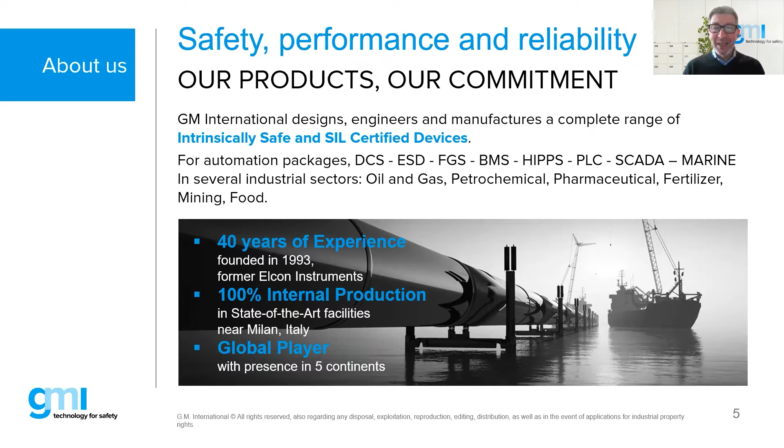On the other hand, we are global players with presence in all the continents. We have about 10 offices and over 75, actually now over 95 distributors, about 200 people. We run many courses along with the webinars.

Also, we do functional safety products. We take special care in manufacturing them, using state-of-the-art technology. We have 100% traceability, 100% testing. We offer 5 years warranty. We are certified globally, because at the end we care, because our products protect the plants they are installed in and the life of the people in the plants and nearby the plants.

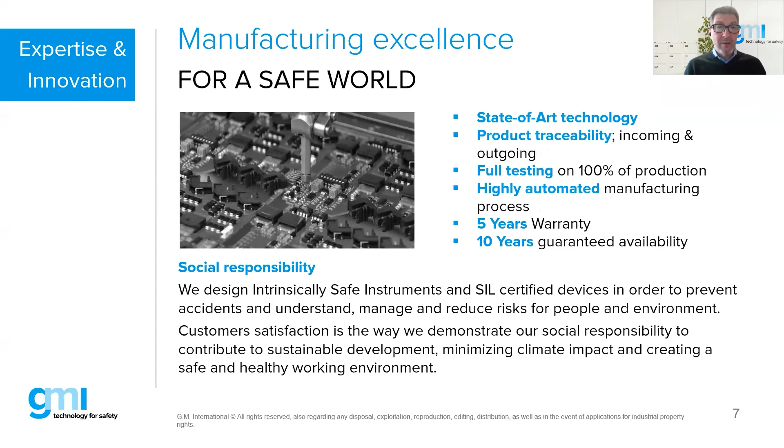Here is our certification. 100% committed to global standard regulations. They change every day. But nowadays I spend all day looking at the sanctions in Russia, which basically say we cannot sell in Russia any longer. And I have just, unfortunately, had to send a mail to our Russian team saying, hey, we have to stop selling.

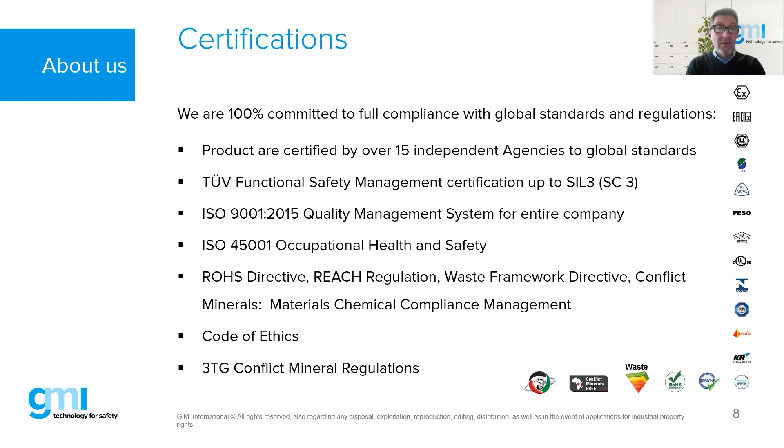So there's a lot of rules and regulations we have to follow, but typically we are certified for EX certification by over 15 agencies. We have TUV functional safety management, ISO 9001, ISO 45001, RoHS, REACH compliance with code of ethics, and so on.

These are the products we manufacture: IS barriers, safety relays with and without line monitoring, isolators, also SIL certified, some power supplies, EX and SIL certified, multiplexers, HART multiplexers, termination panels, SPD or surge protection, loop indicators, and as I mentioned earlier, a division that runs training and education.

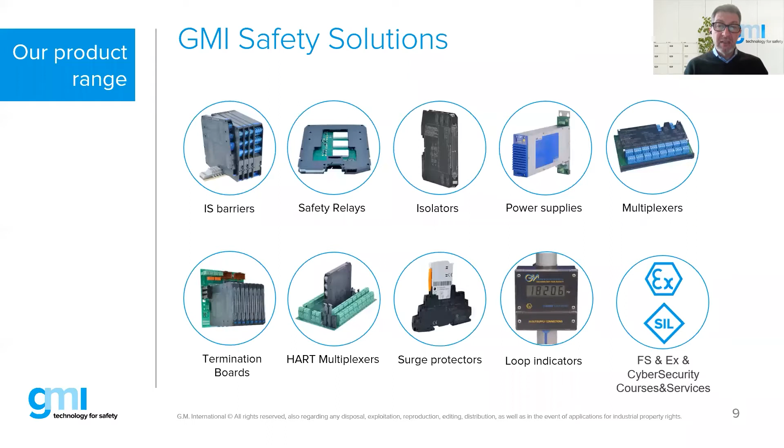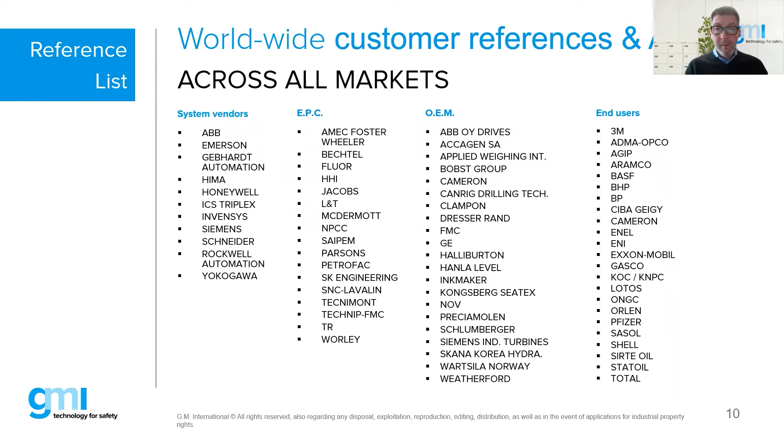Some of our customers, lots of customers all around the globe. We have a lot of OEMs which we are proud to supply to, because they install our product in their machines, rigs, which are typically placed in very rigorous environments. And our products are very, very reliable. So that's about it.

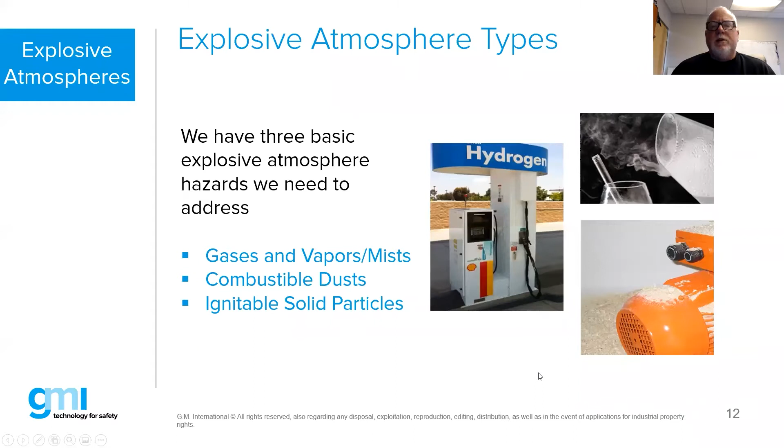So explosive atmosphere types: no matter where you are in the world, we treat explosions or explosive atmospheres in a similar fashion, regardless of the regulations. We have gases, vapors, mist, we have combustible dust, and then we have ignitable solid particles. All three of those, in proper mixtures and proper ratios, when combined, can create an explosive atmosphere. So anytime we're taking electrical equipment, as well as mechanical equipment, and putting that in there, we need to address that by providing certified products or solutions.

The important point to remember here is the term flash point. Flash point is that point at which a liquid, say for example liquefied natural gas, starts to emit vapors - that is considered to be the flash point. Sometimes people get confused with flash point versus ignition temperature. The ignition temperature is the temperature at which it will spontaneously ignite. So flash points are always lower than the ignition temperature.

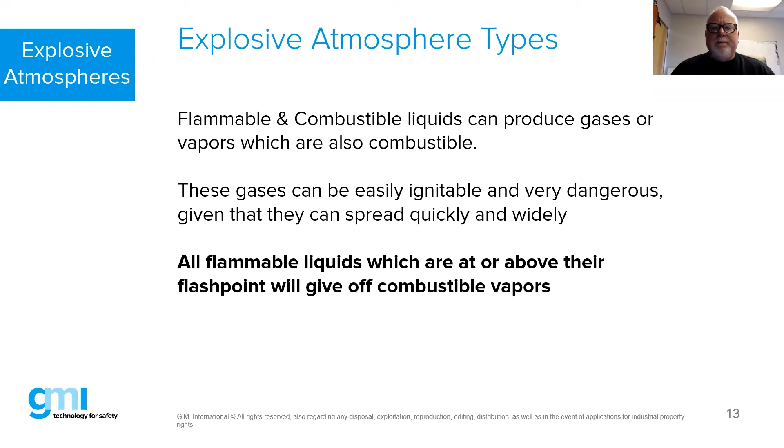Next slide. Yep. Oops. What happening here? Okay, here we go. There we go.

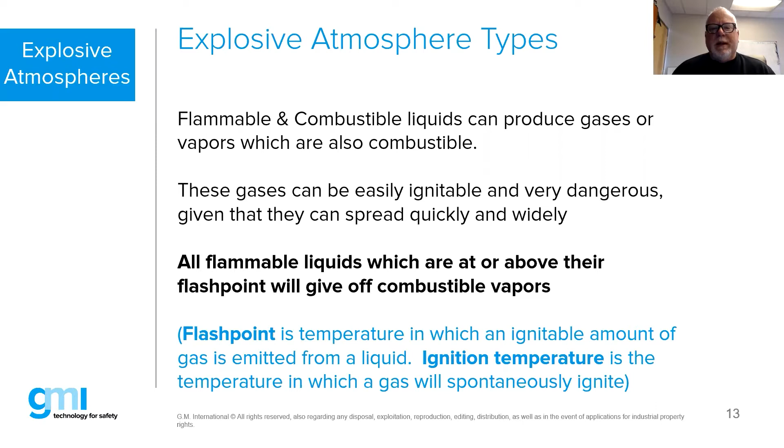Flash point is that temperature at which an ignitable amount of gas is emitted from a liquid.

Combustible dust can be any of the following types of material: metal dust, carbonaceous dust, flour, grain, wood, plastics, and chemicals. Some of you may have seen a video that's gone viral, which looked very much like what's going on in Ukraine right now, but it was a coal dust explosion that took place in Pakistan. It was an entire facility leveled based upon coal dust. They haven't figured out exactly what transpired, but it looked as if it started in an area with transportation conveyor belts, and most likely it was probably some overheating of a bearing.

When we have dust explosions, they can be just as volatile, just as dangerous, just as deadly as gas explosions. We always think of the oil and gas industry or the petrochem industry as having flammable atmospheres, but we cannot forget there are other potentially dangerous atmospheres out there that we have to address in some way, shape, or form.

In order to have an explosion, we have to have a source of ignition, we have to have the explosive material - the fuel - and then we have to have air or oxygen. For the most part, with some exceptions, every explosion will have all three legs of the triangle. Now the sources of ignition can be many different potential sources, which we'll talk about here in a bit.

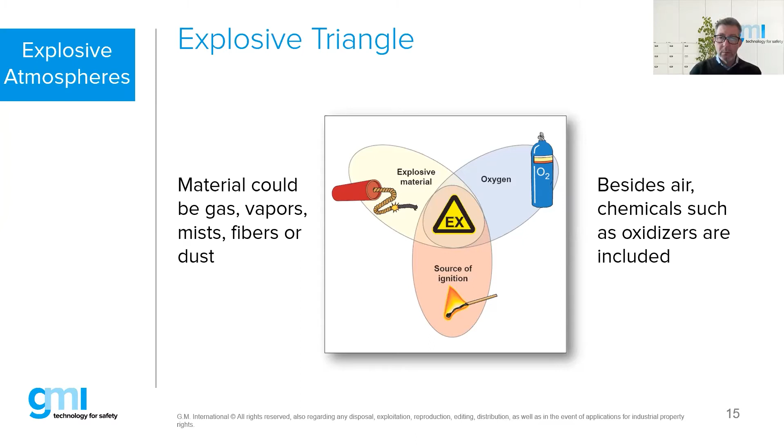What are the common ignition sources that we need to be concerned with? Some of these apply to electrical equipment, but some apply to mechanical equipment as well - things like hot surfaces, bearings, engine exhaust. We had a big explosion here in South Texas about 16 years ago with BP Texas City, and actually the source of ignition there was the diesel exhaust from a truck. That was actually the source of ignition.

Broken, damaged parts, obviously lightning, and then of course things like open flames, fires, cutting torches, cigarette lighters, pilot lights. One thing people don't think about is mechanical sparks. Obviously grinding and cutting create sparks, but even dropped tools or equipment can create a thermite action. Depending on the type of material and the tool you're using in a flammable atmosphere, that can actually create enough energy to ignite that flammable gas.

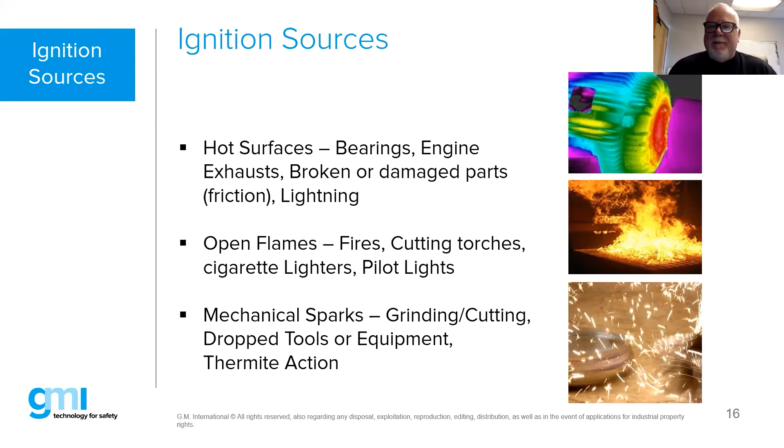Next slide. Yeah, here we are. You see it, right? Not yet. I may be. Sorry. Here we go. No, I see it. I see it.

Stray electrical currents are certainly a big one. Welding, electrical faults, could be grounding issues. It could be, besides just the normal arcing and sparking that we would normally find with contactors making or breaking. Static electricity is another big one that people overlook. Anytime we're moving materials, dust, liquids, anything like that, and putting it into containers or taking it out of containers, we can actually create static electricity, so we have to be concerned with that.

And certainly radio frequency, lasers, radio transmitters, telephones - all of those can potentially create enough energy for us to ignite a flammable atmosphere.

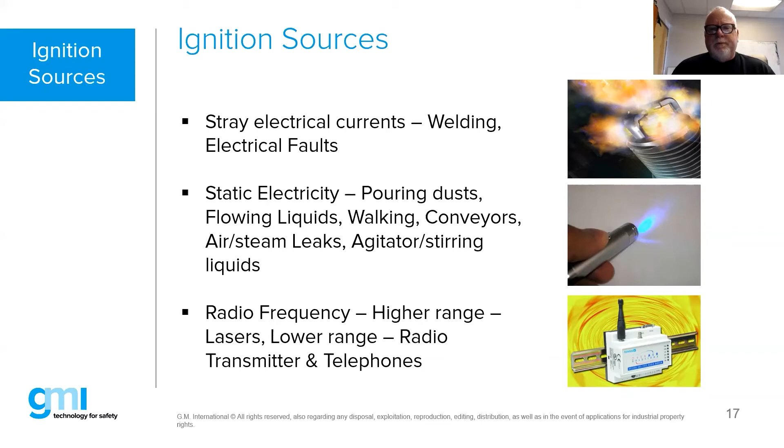Batteries certainly can be a source of ignition. If you take steel wool and put it against the two posts of a battery, or if you just touch them yourself, you can actually get enough of a little shock. Not something I would recommend doing, but certainly that's an issue.

Ionizing radiation is also a potential source of ignition, along with ultrasonics and exothermic reactions. When we think about hazardous areas, we think of the obvious sources like electrical arcing and sparking, but we really need to consider all of these other potential sources of ignition when doing our HAZOPs or facility analyses, to make sure we're not bringing equipment into those areas that could create an explosion, and to consider how our process design minimizes these effects.

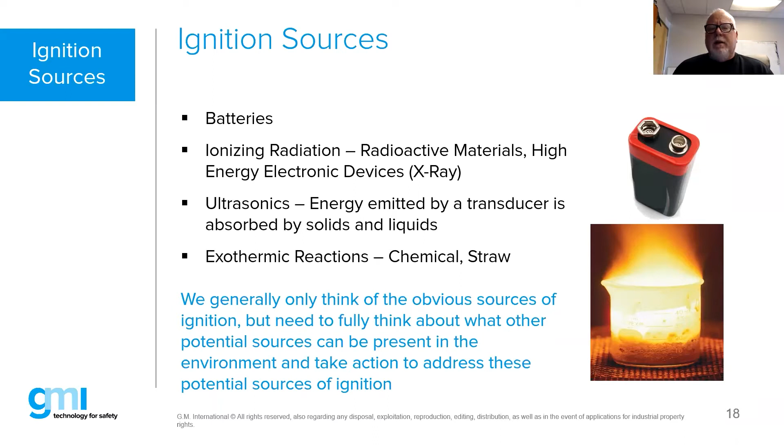Ignition temperature is one of the first things to consider. We talked about flashpoint, but every flammable gas is assigned an ignition temperature. Hydrogen, for example, is a very commonly used fuel and is becoming much more popular as an efficient fuel source. One benefit of hydrogen is that it has a very high ignition temperature, meaning it takes a fairly high temperature to ignite. However, the downside is that it doesn't take much energy to ignite hydrogen, and hydrogen also has a very broad range between its lower and upper flammable limits. So hydrogen is dangerous, but from a temperature standpoint, it's actually one of the easiest gases to deal with.

All these other gases are categorized with Roman numeral designations like 2C, 2A, or 2B, based on IEC standard 60079-20-1, which groups gases with similar characteristics. This makes it easier to select electrical or mechanical equipment for hazardous locations.

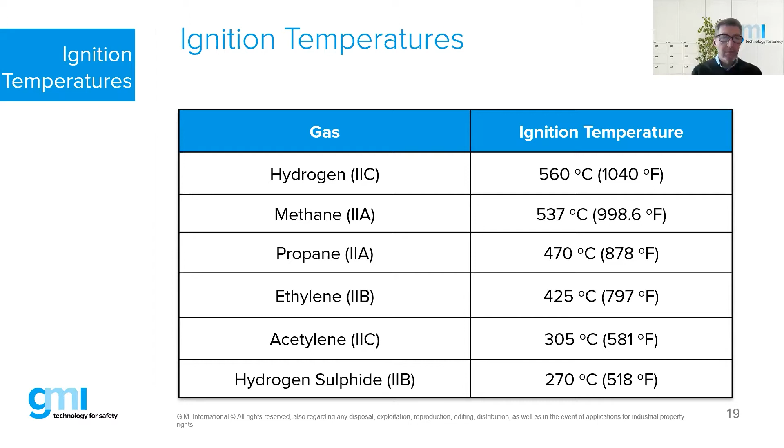Next slide. It's coming, yeah, it's coming. There we go, it's gas groups.

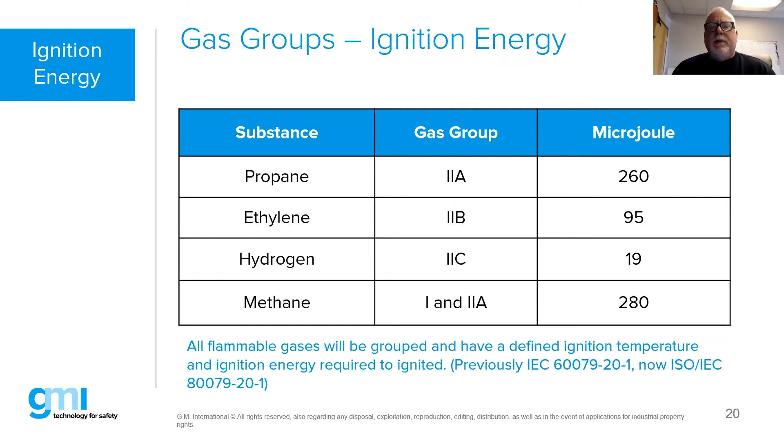Literally 19 microjoules - if I was sitting in a hydrogen-rich environment, standing on carpet, and started rubbing my feet together and lifted them, if there was enough hydrogen present, I could actually ignite it just from the static electricity caused by my feet rubbing against the carpet. So hydrogen is very dangerous, but it's something the world is looking at as an alternative fuel source.

This is another chart giving an indication about hydrogen in particular. I don't want to discount the use of hydrogen, because when properly used, it's an extremely efficient fuel source. However, a lot of people wonder what the dangers are. This chart shows the range where hydrogen-fuel-air mixtures, at certain quantities, create a potential ignition source.

Every gas has what's called a minimum ignition energy curve. This chart tells us that if we have approximately 29% hydrogen to 71% air or oxygen in an environment, it takes about 19 microjoules to set it off - a fairly high amount of hydrogen. On the left side, you'll see propane, which has a much narrower band between its lower and upper flammable limits, and takes a bit more energy to ignite. So propane is a little easier to deal with, while hydrogen is more difficult.

What is the definition of a flashpoint? Can you see the poll, Bob? Yeah, I can see people starting to answer, I can see it. Temperature in which a gas or vapor will... sorry, Pablo, my thing got held up.

You may have asked me a question. I didn't hear, no, I was just saying that the last answer sounds a little off. I said the point is solid. We're not talking solid and liquid, we're talking about gases, so I guess this could be the wrong answer. But I think I have a good idea because I have listened to Bob.

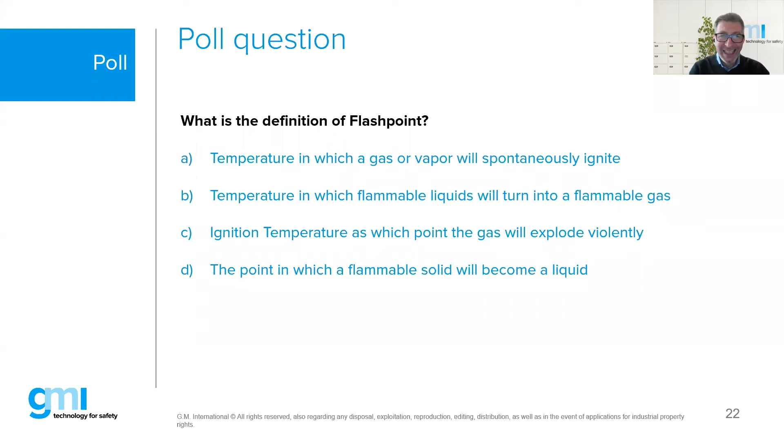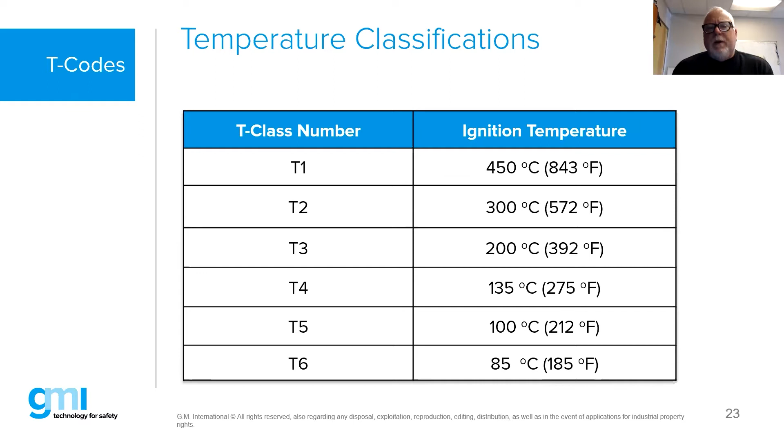So I think the next slide may give an easier understanding of this. If you can forward that, actually, maybe further on. So if you see there, hydrogen, as we focused on before, is a 2C gas, but it's a T1 gas. And remember, if you think back on that slide, hydrogen's ignition temperature was somewhere around 560 degrees C. T1 reflects 450 degrees C. So any gases or vapors that have an ignition temperature above T1 will fall as a T1 gas, so to speak.

Most of the gases and vapors you will find, about 99% of those used in industry, will be somewhere between a T1, T2, or T3. There's a handful of gases and vapors that have very low ignition temperatures. Carbon disulfide is one of those gases that is the lowest, and it has an auto ignition temperature of actually 90 degrees C. So it is very, very difficult to deal with.

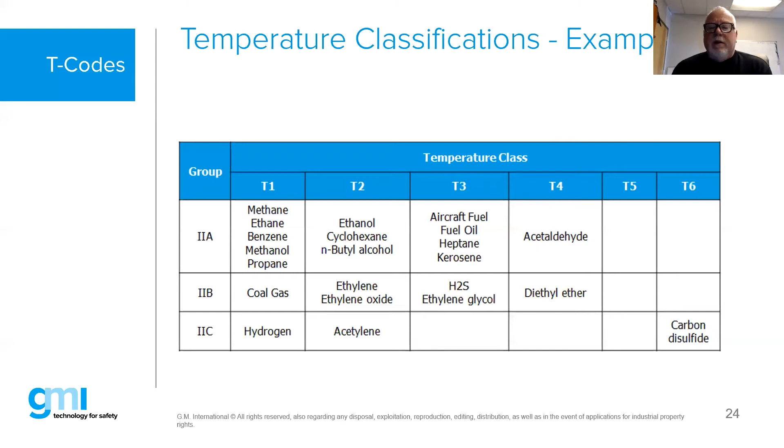A T4 product means that that product, on its relevant surface, will never exceed 135 degrees C under its maximum ambient rating. So if I have a flame-proof motor rated T4 and its maximum ambient is, say, 50 degrees C, the relevant surface exterior to the motor will never exceed 135 degrees C.

Therefore, I can use that motor in any environment where the gases are T4, T3, T2, or T1. I could not use that motor in an environment where the gases are T5 or T6. Hopefully that makes sense.

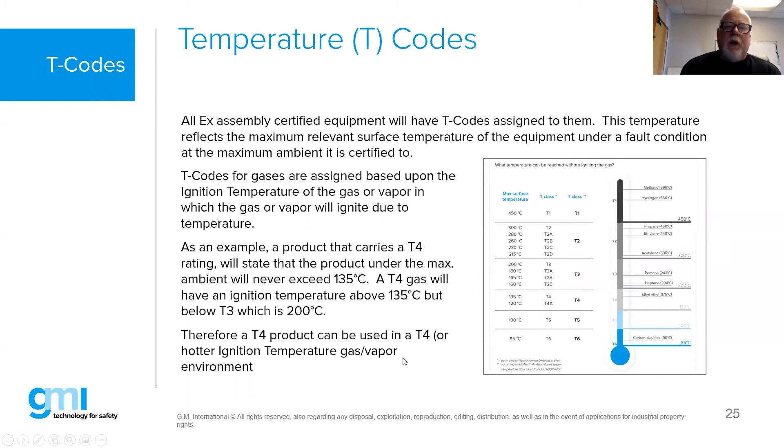Next slide, the next slide on density. Another factor in which we get into area classification is the density of the gases and vapors. So when we get into area classification requirements and we start looking at what is a zone 0, zone 1, zone 2, which I know I haven't talked about, but I assume most of you are familiar with, we also have to take into consideration the density of the gases and vapors in the environment.

So hydrogen being lighter than air, it has a density less than 1, will obviously go up near the roof, or if it's in an outdoor environment, will be dispersed into the atmosphere. Other gases, things like propane or gasoline vapors, are heavier than air. They will collect near the floor. So our area classifications will change based upon the potential flammable gases that we could see in our process facility.

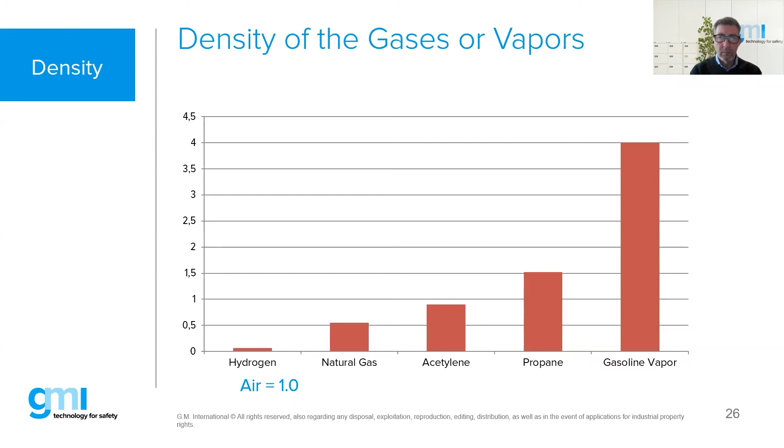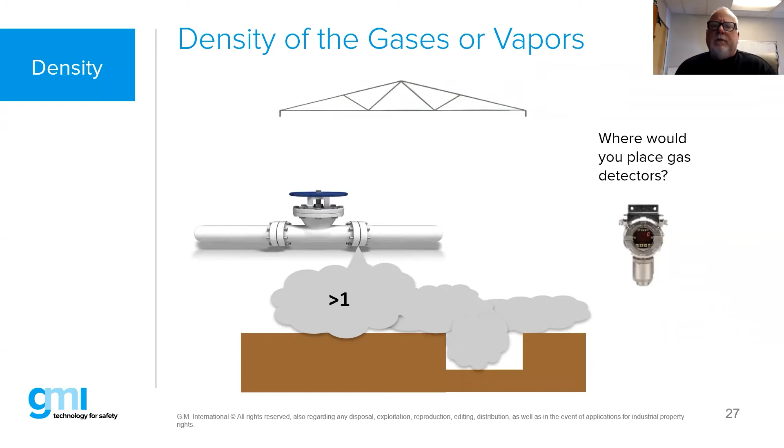Where we would place those gas detectors is based upon the density of the gas in that process pipe. So if it's heavier than air, we put our gas detectors down in lower areas. If it was lighter than air, then we would put them up near the roof. If it was the same density as air, then we'd locate them pretty close to the same elevation as where our piping is located. So density is a very important consideration to understand with regards to flammable gases and vapors.

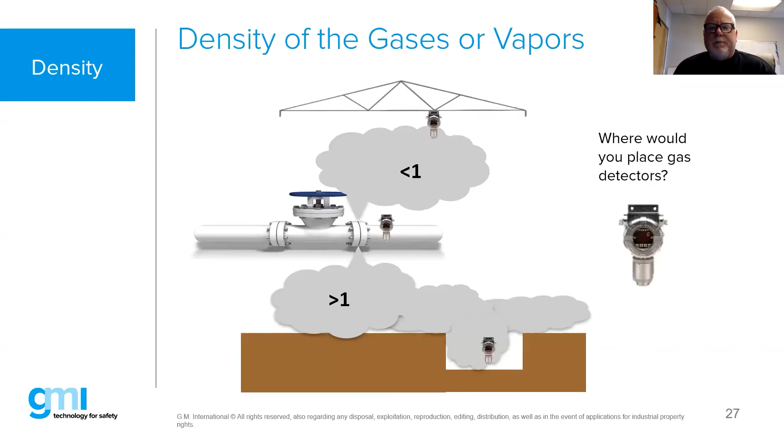All right, great, Bob. Here's the other poll. You just spoke about this. Let me launch it for you guys. You can answer. What is the T-code for a maximum surface temperature under normal or fault condition of 125 degrees C? This is a little bit difficult because you've got to remember what those numbers stood for, especially if you're not familiar with the Celsius scale.

So we had... you actually spoke about this, so I actually used this perfect example. You mentioned the answer. Yeah, you mentioned very clearly this T-code, and as soon as I said that, the correct answer started to increase. I can see your answers, guys, as they go along.

Great, but while we get this answer, you mentioned 19 microjoules will ignite hydrogen in the worst case scenario. Give me another example of that. If I drop my pen? How much energy is 19 microjoules? I'm trying to think of a practical example of microjoules. What if I take a small hammer and I go bang on my desk like this? Would that be enough?

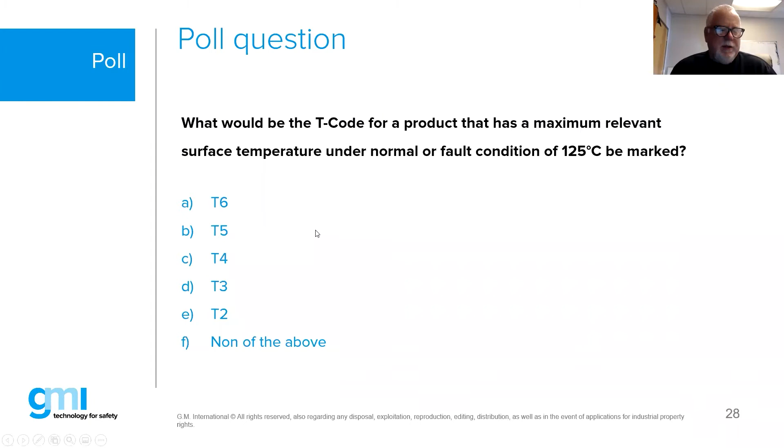And when we teach our students in the classes, I hammer this home. I say, by the end of the week, when it's all said and done and you've gone home, the one thing you will remember is T6 is 85 degrees, and so forth. So it is one of those things in the Ex world you definitely want to have a good handle on.

Right. So we talked a little bit about area classification, with density of the gas and the T-codes and all that other good stuff. So this is also out of the GMI wall chart. So we categorize a place where there could be a continuous period in which gases or vapors are present. We would consider that to be a zone 0 environment. If it's an environment which is only there occasionally during normal operation, we would consider that to be a zone 1. An environment in which it's not present during normal operation, but can be there for very short periods of time, we would consider that to be a zone 2.

The same thing holds true for dust. Instead of zone 0, it would be zone 20, 21, or 22. And then under ATEX, there are some requirements for the manufacturers from a marking standpoint. So we won't go into all the details on that, but there are some of the marking requirements that you will see. And then on the far right-hand side, you'll see what are called equipment protection levels, which are things like GA, GB, GC, so forth and so on.

So we use the IEC 60079-10-1 for gases and vapors, but there are also some other documents out there for area classification. The Energy Institute, IP15. Also in the United States, we have our recommended practices published by API. And then we also have what is called the NFPA 497 document. So they're all very similar. There are some differences, but they all are basically doing the same thing, trying to categorize the quantity, the amount, and classify these areas so we can better select equipment to be used in those facilities.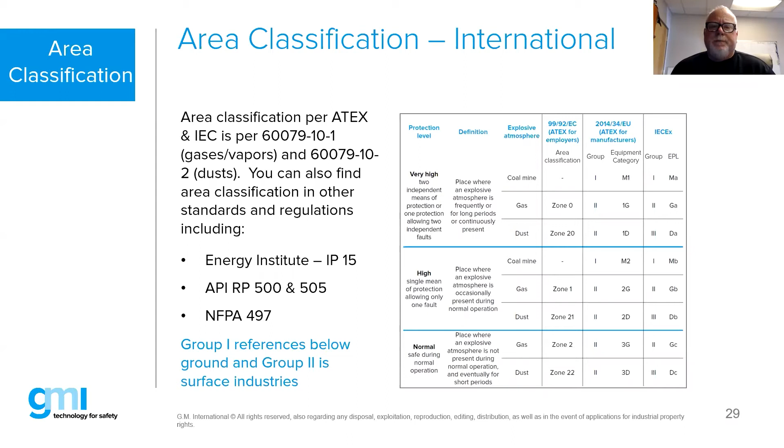Okay, next. So there is our category designation, and this is actually per the ATEX directive. So M1 or M2 are mining applications. 1, 2, or 3 are surface equipment groups. So it's either 1G, 2G, 3G, and that would be for gases. 1D, 2D, 3D for dust. Under the IEC EX, we basically have equipment groups. And actually, that's a little bit misleading. Well, actually, no, it is. It's GA, GB, GC, as opposed to 1G, 2G, 3G under ATEX. So the categories under ATEX or the EPLs under the IEC EX mean the same thing.

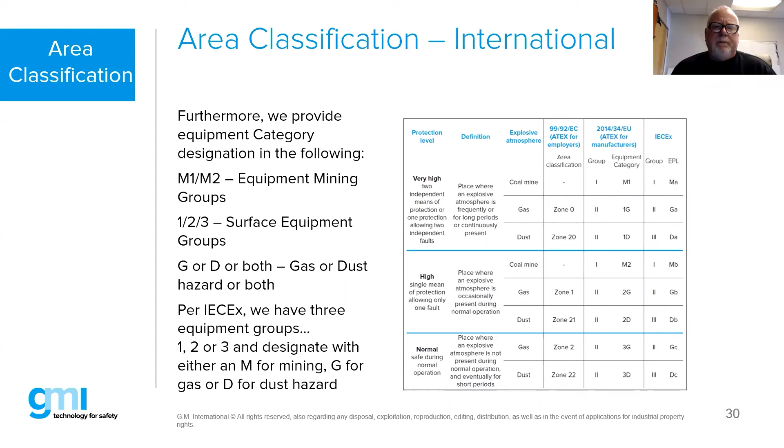And your protection levels? Right. So since we're saying a zone 0 environment is an area in which a flammable gas or dust will be present continuously, we require equipment to have a very high fault tolerant level, meaning that equipment that's approved for that environment, in effect, must be double fault tolerant. So sometimes people will ask, what's the difference between an EX ia and an ib intrinsically safe barrier? Well, an ia barrier is a 2 fault tolerant product, where an ib barrier is single fault tolerant.

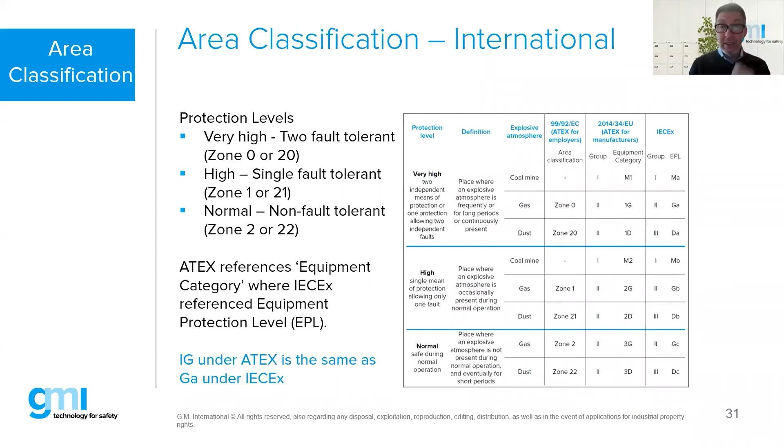So there's not the redundancy built in to a piece of equipment that's ib as there is in an ia. So for example, an ia barrier will have 3 independent Zener diodes, where an ib might only have 2. So that's why you find EX ia equipment generally is a little bit more expensive, but it also has to be much higher fault tolerant. Next. Yeah, and it can be used throughout all the gas groups, so it's easier to go that way typically. But there are some other differences.

Oh, here we go. Another poll question, guys. Let me launch it. Yeah, we were just talking about this a few moments ago, so I hope we have mostly the right answer. So what is the definition of zone 1? Is it where you have a hazardous atmosphere present frequently or continuously, a hazardous atmosphere present occasionally during normal operation, not present occasionally but infrequently, or where a dust hazardous atmosphere is present?

Okay. I cannot read the audience. Okay, so yeah, I would discard the last one. Bob, or am I making a wrong assumption here? So on the last one, that's a dust hazard, right? Right. A dust hazard would be, in that case, a zone 21 hazardous environment. So yeah, right, 21. Yes, you're right. We can rule out D.

It's A, B, or C. But Bob gave us a good indication of that. When you have 0 it's the worst case scenario, 1 is the middle case, 2 is less dangerous, if you wish. Not less dangerous, but less likely to be dangerous, right? Let's say it like that. Yeah, well, here's a little bit of a misconception. The thought process is that in a zone 2 environment, if we have an explosion, it's going to be less dangerous, right? That's not really the case.

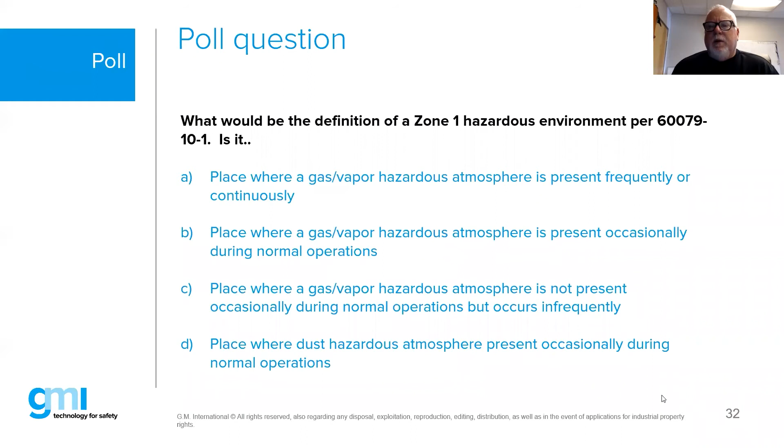Things like that drawing that I showed, those flanges of the pipe, we would consider that to be a source of release, but that's typically going to be a zone 2 environment, right? It will only happen if there's a leak in the flange or something goes wrong. That's right. It's not something that we would expect under normal operations, but it could happen. And so we want to take that into account.

So without going into all of the various protection concepts, because we are limited on time, I do want to at least mention a couple things. The EX protection concepts are broken down into 4 main categories for gas and vapor protection. So we have energy limitation. Think about hazardous location equipment: we've got a triangle, and we want to remove one or more legs of that triangle. So with energy limitation, we're basically removing that spark, keeping it low energy. Intrinsic safety is a prime example of that.

Non-sparking, another means where we're saying no sparking. We're assuming there's still fuel present, there's still oxygen or air present, but there's no sparking; that's considered to be increased safety. Containment, here's where we're talking about flameproof, where we have an arc and a spark, we have a fuel, but it'll be contained on the inside of, for example, a flameproof enclosure, or maybe sand or quartz filled, which is also considered to be containment.

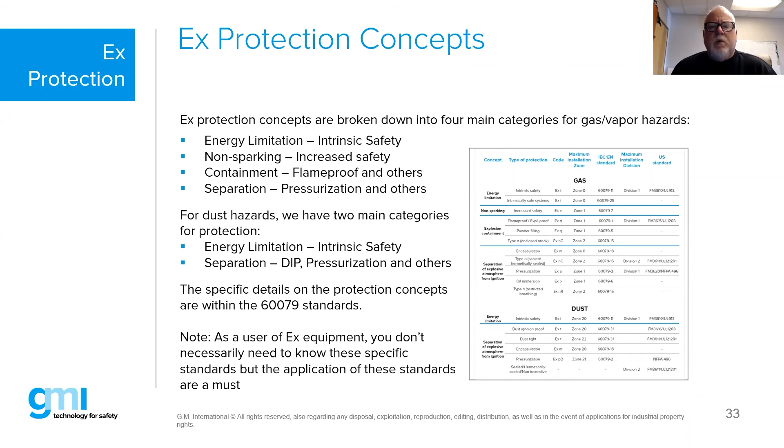A lot of people say, I need to really know the details of, for example, 60079-1, which is the standard for flameproof. Well, it's really important for the manufacturer to know that. It's not necessarily important for the user. The standard you would really want to be following, and that we teach about in our classes, is the -14 standard, which is your design and application standard, and -17, which is your inspection standard.

Oops, sorry, I don't know what I did. I clicked. That's okay. No, I think that's the right next slide. Yes, here we go. Sorry.

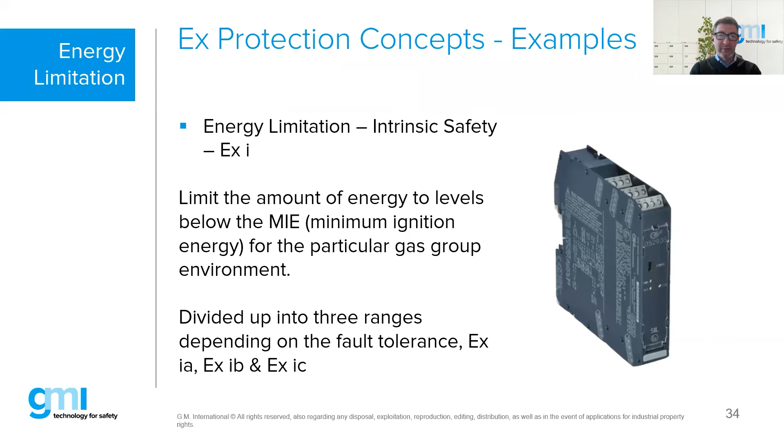That's energy limitation. We're limiting the amount of energy below the minimum ignition energy, and it's divided into different ranges, Ex ia, ib, and ic, depending on the fault tolerance. Non-sparking is increased safety. There's also a lesser form of Ex e, now known as Ex ec, and Ex e will now be known as Ex eb. So they've added the EPL letters to the end of the protection concepts, and you're seeing a lot of that in new marking requirements.

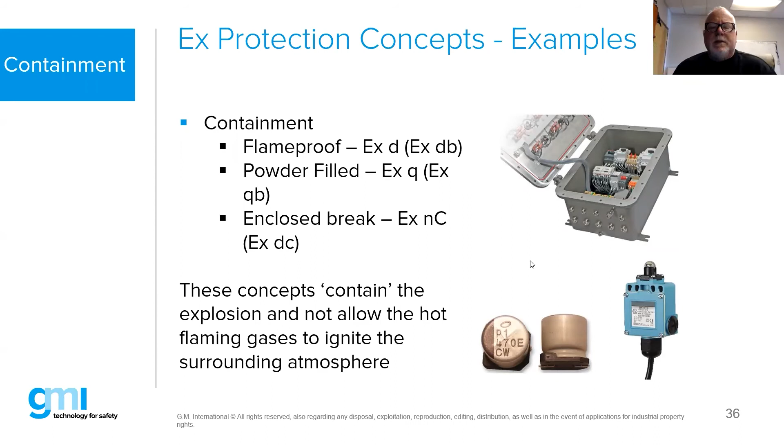Containment: flameproof, commonly known as Ex d, now known as Ex db, powder filled, enclosed break. They contain the explosion and do not allow the hot flaming gases to ignite the surrounding atmosphere. And finally we have separation. Encapsulation is using something like a resin, hermetically sealing it, pressurization, oil immersion, restricted breathing. So we're removing the flammable atmosphere away from the ignition source by various protection concepts.

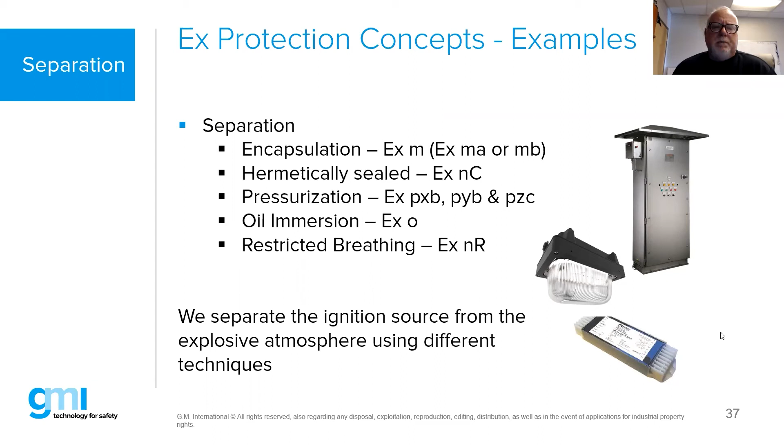Okay, Mark. So markings, just briefly going through this. On the very left-hand side, you'll see a CE mark, a 0575, and an Ex.

Everything that you see where it says under directive marking, that's a requirement under the ATEX directive. So any product must have a CE mark, an EX, and a hexagon, a 0575, which designates who the notified body is, then the equipment group, equipment category, and gas atmosphere. So Roman numeral 2 means above ground. Equipment category, in effect, means a zone 0. And then G means for gas atmospheres.

Then what you see on the right-hand side, starting with EX, that's your EX marking string. The standard marking string that you see on the right-hand side, starting from EXIA, 2C, T4, GA, that's your requirement under the IEC-EX scheme, and it's also a requirement. It's the same marking string under the ATEX directive.

So then what you see down at the bottom, starting with your certificate information, you'll see an ATEX certificate will look like what you see there, a BVS 14, ATEX, so forth and so on, your IEC-EX information, and so forth and so on. The important thing to note on labels, and this is really important, especially if you're doing design and inspections, the X means that it's a condition for safe use. So that means there's something about that particular piece of equipment that, in order to be used safely, it must be installed in accordance to whatever it states, not in the standard, but in the certificate. So it's important to understand that.

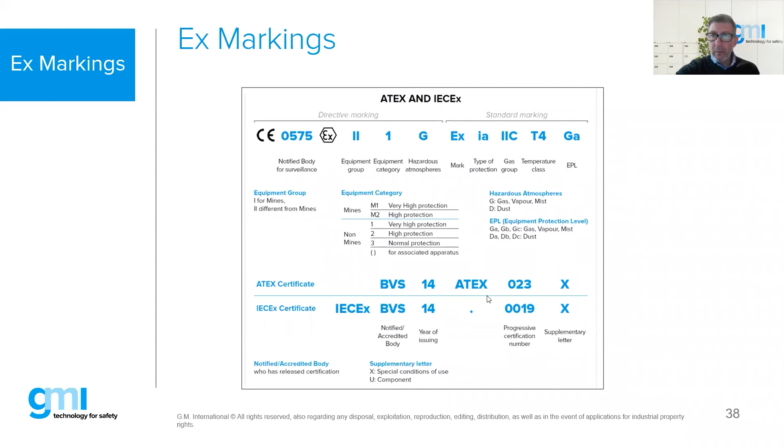Okay, next slide. Okay, why can I not move forward? Here we go. Yeah, there we go.

We do have a question here that you might be able to answer. It says, is CE marking always required for an ATEX or IECEx product? It's always required for an ATEX product. It's not a requirement for an IECEx product. And that being said, just because it has a CE mark doesn't necessarily mean it's compliant to the ATEX directive, because there are, I believe, 26 different directives that are in place within Europe. There's what is called the Toy Safety Directive. There's the Low Voltage Directive. There's the EMC Directive. There's a whole bunch of them. And any product that falls under the scope of those directives is required to have a CE mark.

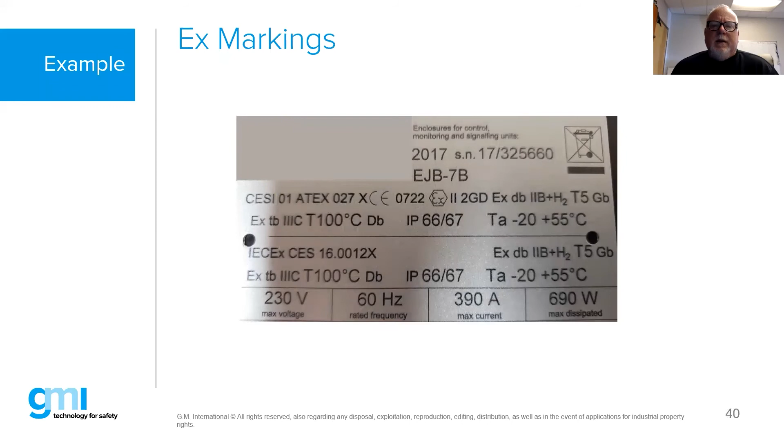Here is another example of a marking. I think you can see it. To be honest, we can probably move along on this because this is more or less telling us... Now, this marking string is somewhat difficult. It's actually one of the more difficult marking strings that you would see. So maybe we'll just... You mean on this poll? Yes, for this poll. So it'd be a tough one to answer. It's a very tough one.

Yes, but I can eliminate something. Let me share with you this. Let me launch it. I need to hold one screen today. So, what best answer describes this marking? You can do the process of elimination because EXDB is the indication for flame proof. Flame proof, yes, D is flame proof. You're right, so you can definitely say that the last answer is definitely wrong. Then what do we have?

I'm not sure, but I can read the entire string. Here we go: IA in brackets. Something in brackets means something inside, right? That's right, it's EXD—we're talking about a flame-proof enclosure. So something inside is IA, meaning it's intrinsically safe.

And then we have IIC, so the gas group that can be used, and T6 is the temperature code. Right, and GB or GA. Well, there I got lost. So GB tells us this product can be installed in a zone 1 area. The GA in parentheses reflects what's in the brackets as the associated apparatus, which can be from zone 0.

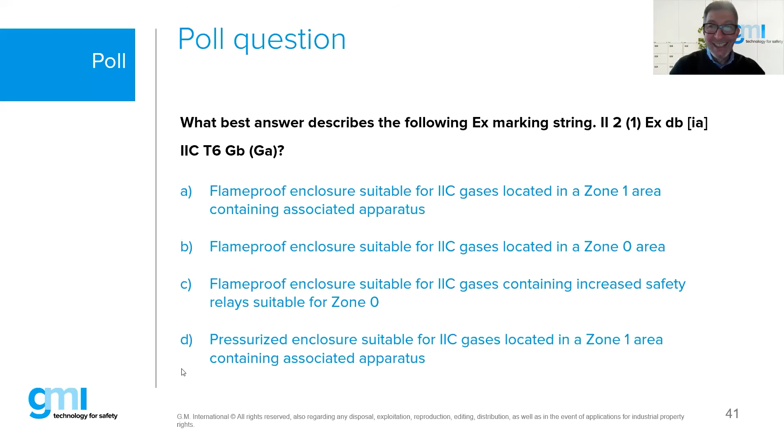Officially, anytime you see brackets like that with an IA, that's considered the associated apparatus. That's mounted inside a flame-proof box, but it's providing downstream protection into a zone 0 environment. So you have a flame-proof box mounted in zone 1, but the parentheses where it says GA is actually saying that the associated apparatus is providing protection into a zone 0.

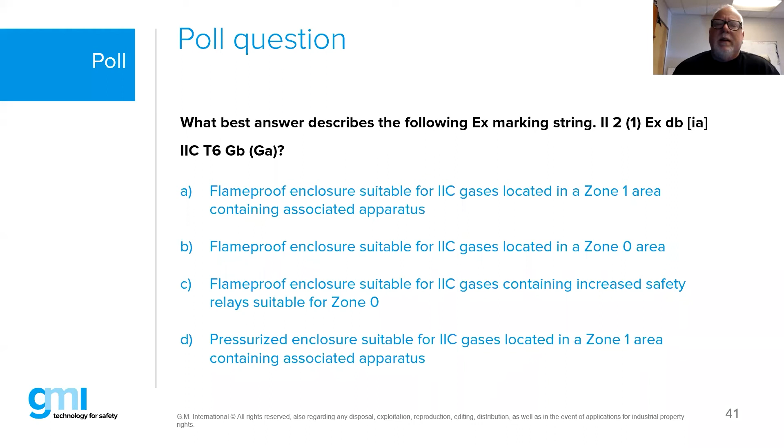So there you go. Okay, what do we get, this SIL wall chart? Yeah, I'm not going to explain that. So what do we bring in this? You were saying the SIL is also relevant in this product, I guess, right?

It is. Well, functional safety—actually everything within the EX world—there's a lot of overlap between functional safety and EX safety. You're going to see more and more of this because, in effect, what we're doing with hazardous location installations and applications is a risk assessment.

And functional safety, that's basically what we're doing. We're making a risk assessment, and under functional safety we're trying to categorize how reliable and how safe is safe. We want to put that down in percentages and do the calculations. And that's why today barriers or any of these products used in the EX environment carry a SIL number—SIL 2, SIL 3.

Yep, and it has to do with doing a risk assessment, as you say, and you say, well, my risk is very high, I need to reduce that risk a lot, so I need a product that allows me to do so—one that's more reliable.

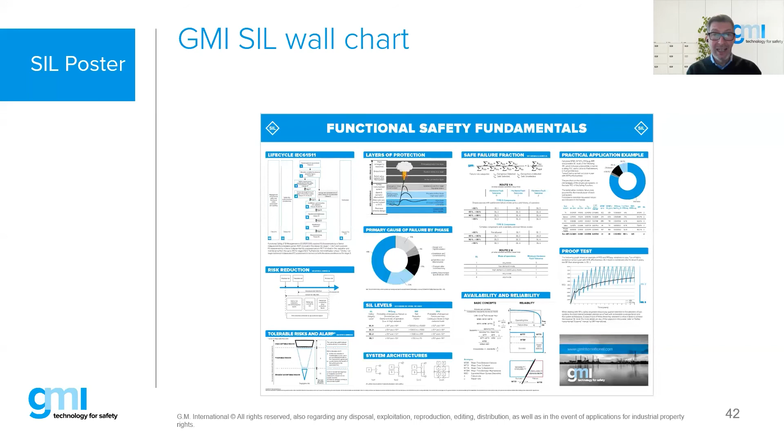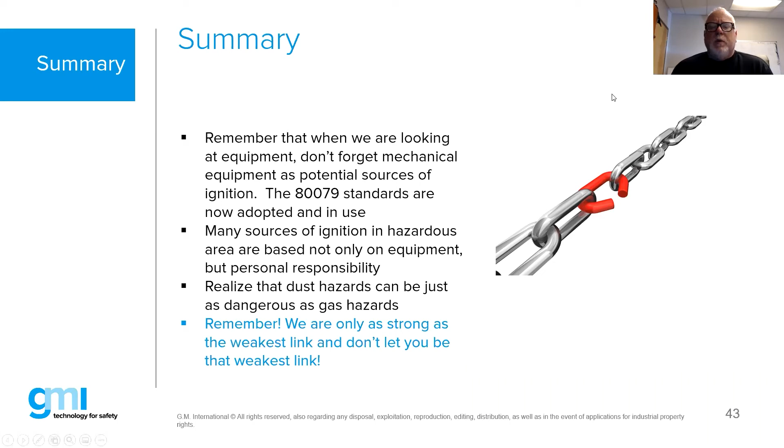Okay, summary, so we can go to question and answer soon. Remember that we are looking at mechanical equipment—we briefly mentioned the 60079 standards, but there are now 80079 standards developed from the original Cenelec standards, addressing mechanical equipment for use in hazardous locations. So just be aware of it, it's out there. You're starting to see it from more and more clients, and regulatory agencies are starting to require this. So again, more knowledge that we can have by doing these webinars—iron sharpens iron. It makes sure that we're only as strong as the weakest link, and we don't want to be that weakest link, right?

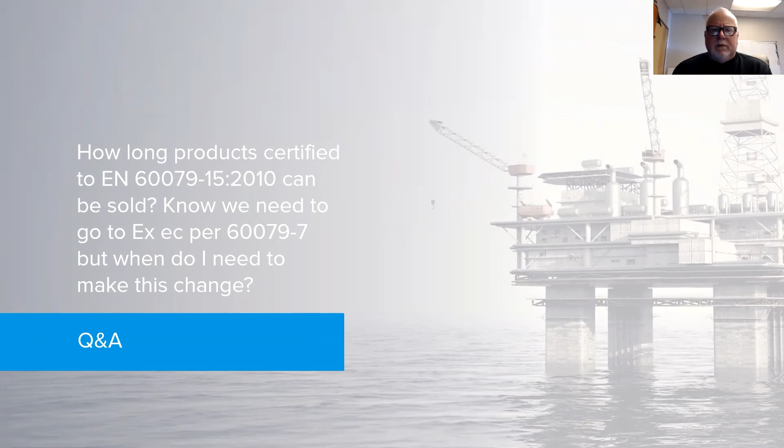So I think this question also came along: how long can a certified product be sold, or not? Or what do I need to do when the standard changes? So if we look at this slide here. Yeah, I got it. This is a great question, and it comes up every now and then. So EN standards do ultimately get withdrawn, right?

They are published by the European Commission, who put out the official journal, and you can do a search on the official journal. I did a search specifically under the 79-15 from 2010, because that is not the latest standard, and it does not show a date of withdrawal. So I can't answer that question, because on the right-hand side it would actually say there is something in there that says this will be officially withdrawn. Then that is up to each country. It's basically telling each country as part of the European Union, okay, you need to ultimately withdraw this standard because it is no longer valid, right?

Now, the question that's somewhat related, but under IECEX, people ask: do I have to get a product certified to the latest edition? Not necessarily. However, it says a new or initial IECEX shall only be issued to the current standard or one edition prior. So if you're looking to get something certified around the IECEX scheme, it makes sense to do it to the latest edition, obviously, but there is a little bit of a fallback to allow you to go one edition prior.

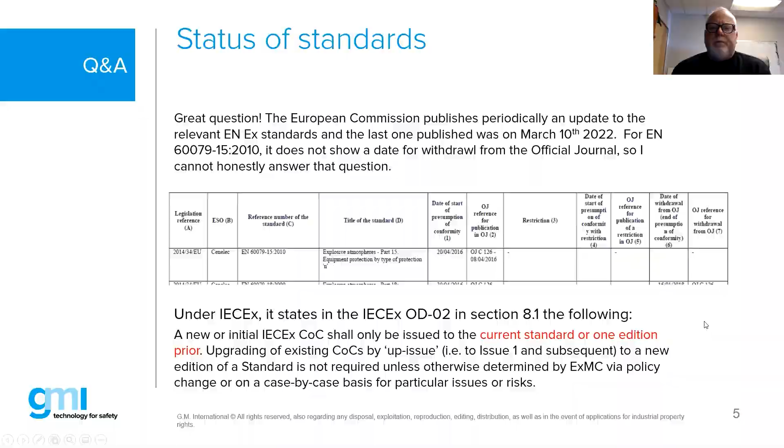Okay, what is mechanical protection around coupling? What material can I use? Well, that is a question for you, Bob. I'm not sure if I'm answering the question correctly here, but this was what I was thinking.

In the 80079-36, we talk about possible ignition sources, and it's very similar to what we talked about previously: hot surfaces, stray currents, static. So around couplings, we want to evaluate the materials to make sure that none of those materials create an issue, because a coupling potentially can create friction. So we want to make sure that the materials we're using will not overheat or will not create friction, or if they do, we're addressing it in some way, shape, or form. There are specific details on how to address mechanical equipment in -36.

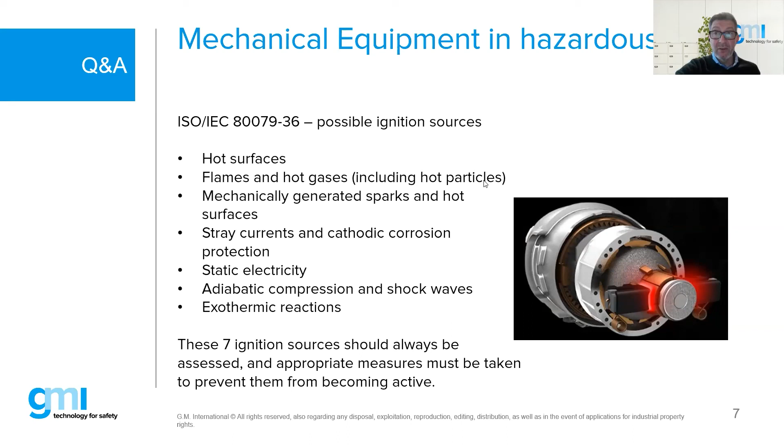Not 100% sure about this, Bob, but I know that some of the material we have to use, for example the plastic, has to follow a certain standard. You cannot have built-up static, so there are certain mandated regulations. You have to have a certain amount of carbon additives to hit. The aluminum you're using for the casing has to have a certain specification. You cannot just use any material. That's correct, but I imagine there are standards to be followed.

Okay, so is there an equivalent to ATEX in the US? Well, I guess so, or not. I'm not sure.

This comes up every now and then: is ATEX allowed in the United States? ATEX is a European directive, and we don't recognize ATEX in the United States. It's not to say that people haven't used ATEX equipment in the US. One of the issues with Deepwater Horizon was that the US Coast Guard found a lot of ATEX equipment on a lot of these rigs operating in the Gulf of Mexico. They changed the rules and regulations after Deepwater Horizon to basically state ATEX is no longer allowed. Part of the reasoning was because under ATEX for Category 3, Zone 2 equipment, you can actually do a self-declaration, and the Coast Guard said we don't want that. So in the US we're governed by basically three regulatory agencies: OSHA, BSEE, and the US Coast Guard. We typically follow the NFPA, which is considered our national electric code, or we follow API recommended practices, or we follow the Code of Federal Regulations published by the federal government, depending on the location and type of facility you operate in. Ultimately it's up to each jurisdiction - the authority having jurisdiction as to what they will accept.

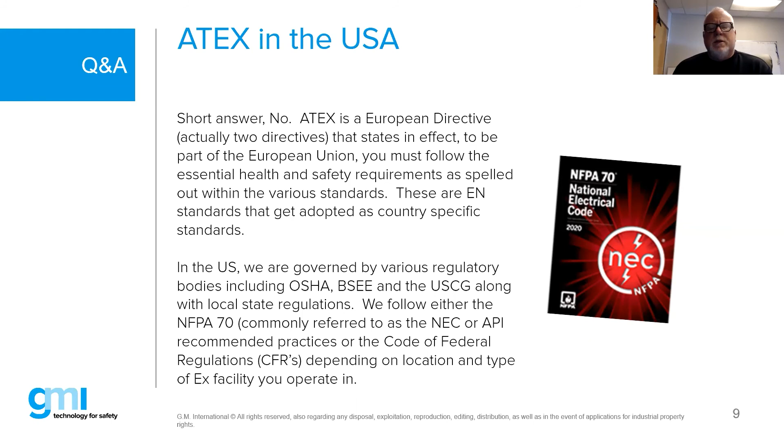So the next question is on cable. Under ATEX, is it mandatory to use armored cable? I haven't seen many armored cables here in Europe, so I guess the answer is no, but I'm not sure. Well, there are some requirements within some of the EN standards. For example, EN 61892-7, that's specifically for MODU, mobile offshore drilling units. It specifically says you must use armored cable for Zone 1 or Zone 0 applications. Now generally speaking, the EN standard for hazardous location is the -14 standard, and while it recommends that you use armored cable, it doesn't state specifically it must be armored cable.

Cables don't fall under the scope of the ATEX directive. The important thing to note with regards to cables and hazardous locations is the reason why the armor is there is to provide mechanical protection. However, you can provide mechanical protection by other means besides armored cable. We can protect it by location, by the use of open conduit, or by the use of trays. There's various means to protect cables. Armored cable is just widely used.

And by the way, under the ATEX directive there is an exception, such as heating cables. So heat trace cables does fall under the scope. Cables themselves are not considered to be potential ignition sources, so they fall outside of the scope of the directive.

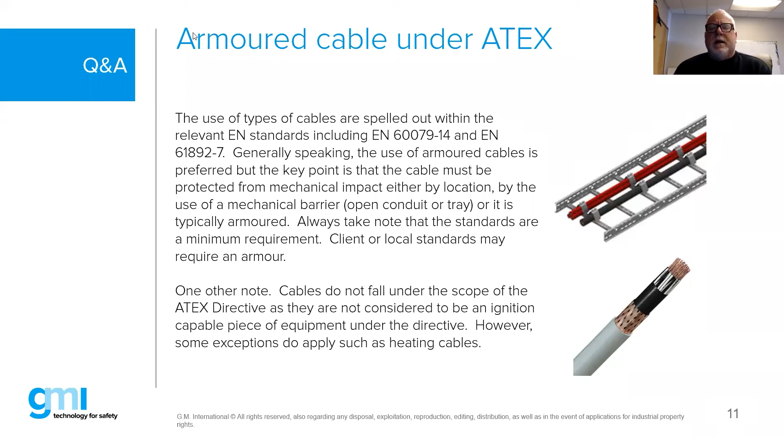One more question: can I install an ISB, intrinsically safe barrier, in a Zone 2 environment? I think you can, if they are certified for it. That's right. A lot of barriers, like what we saw with the GMI marking, that barrier was actually approved to be installed in a Zone 2. So we could install it in a Zone 2 environment - we would have to put it in a certified EXN enclosure, and it is perfectly allowed.

However, if we had to install a barrier into a Zone 1 environment, then we go back to either a flame-proof or we look at a pressurized enclosure. There may be some instances where we're required to do that as opposed to having them all located in a safe area, because part of the evaluation is the length of the cable with capacitance and inductance. We want to try to keep the field device as close as possible to our ISB. Sometimes if the panel is located in a safe area and it's 1,000 meters away from that transmitter, besides voltage drop, we also have to take into account the capacitance and inductance on that circuit.

Plus there are some installations where everything is in the hazardous location. That's right. And the barrier itself can go into a zone - for example, not a rig but FPSOs, or something where you want to contain it next to it.

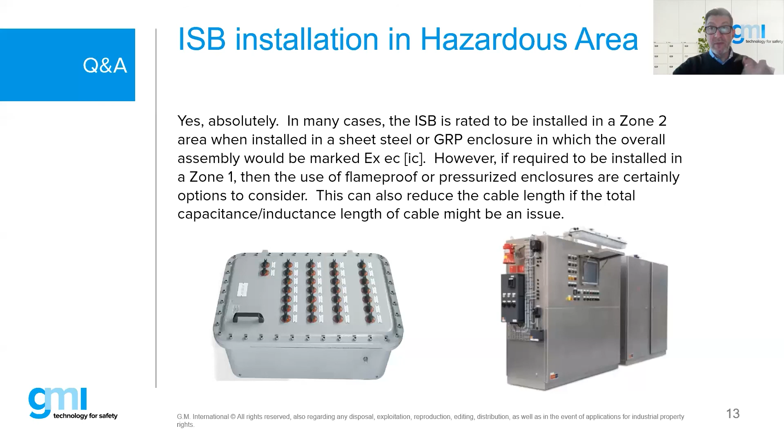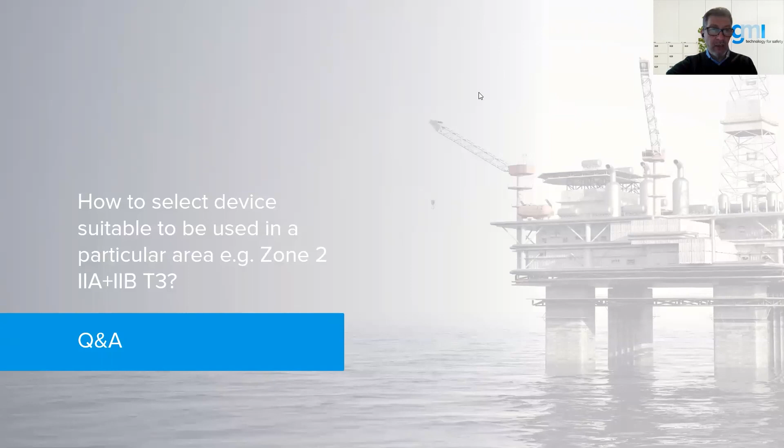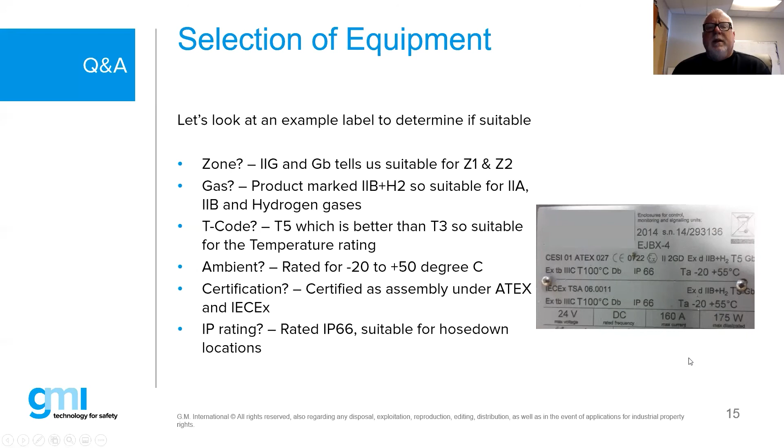Well, the ATEX 2G and the GB is telling us it's suitable for zone 1 and zone 2. It doesn't say specifically zone 1 or zone 2, but that's what it's telling us. The gas, in this case, is marked 2B plus H2, so it would be suitable for 2A, 2B, and hydrogen gases. The T-code has a T5, which is better than the T3 requirement. The ambient rating is -20 to +50. It's certified under ATEX and IECEx. Finally, the IP rating is IP66, suitable for hose-down locations. So it would be suitable.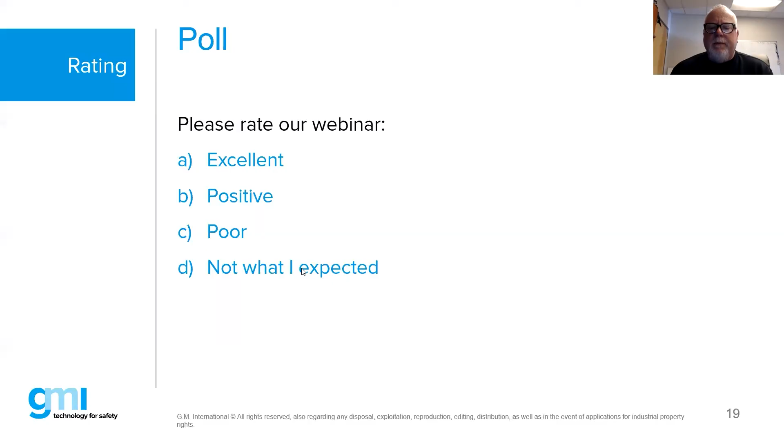Well, that's a whole other topic, but with regards to EX equipment, the biggest issue we find with potential corrosion, which somewhat relates to cathodic protection, is dissimilar metals. This is a big issue with cabling, cable glands going into enclosures. Actually, the session I'm doing with these gentlemen right now is kind of in that area. The big issue is if you take a brass gland and install it into an aluminum flame-proof enclosure and put it in a saltwater environment, then all of a sudden the aluminum enclosure acts as a sacrificial anode. We don't want to see that. So you typically want to use nickel-plated brass. You certainly want to use things like thread lubricants on any of the joints. We want to see that type of stuff with regards to providing cathodic protection. But it's a whole slew of different things you can get into. Maybe one day we'll make a webinar on that.

As usual, Bob, your knowledge is outstanding. I'm sharing the results. We didn't get all excellent today, but that's expected. Firstly, my fault, my presence, also this technical issue. But thank you, guys. We didn't get any poor, so that's great.